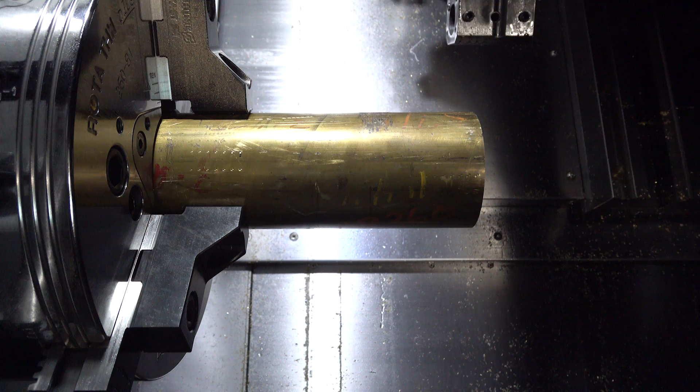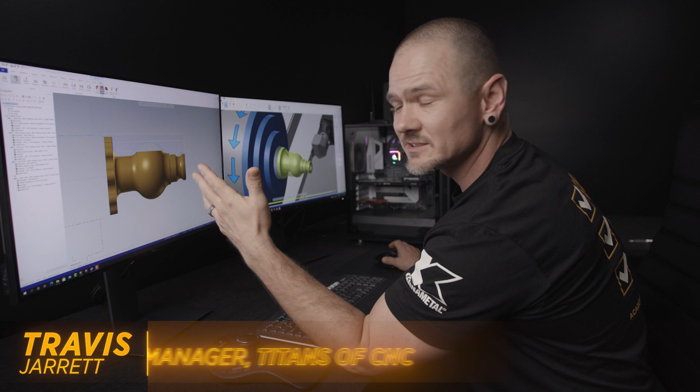As you can see today, we're machining some brass, and we thought this would be a good time to introduce to you a toolpath that maybe you're not necessarily too familiar with. I have not been too familiar with it, so it was good for me to kind of get in there and learn a little bit about it.

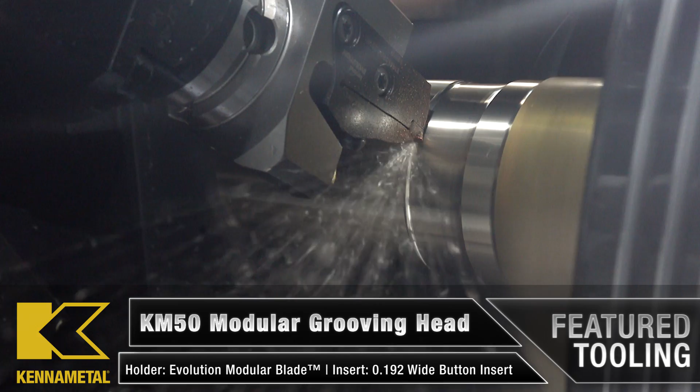It's called dynamic roughing. It's on the lathe, right, not the mill, but it's still dynamic. It uses button tools from Kennametal, which are full radius groovers, and the idea is that it saves you time by turning both back and forward, making lots of chips, helping you get the part done fast.

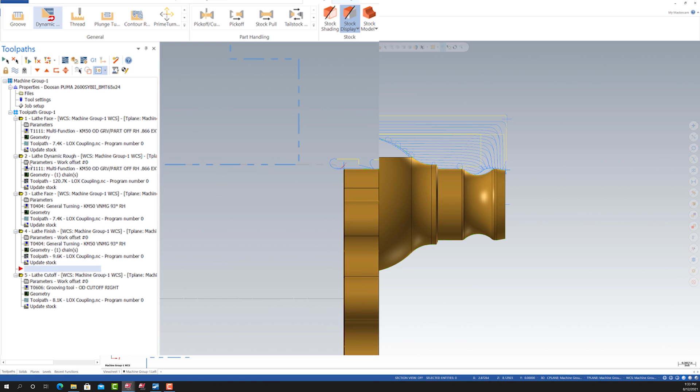So you can see the button is right up here. We have dynamic roughing. I'll click on the path I have right here to kind of show you what it looks like. So if you go to your dynamic roughing parameters, what you're gonna see is choices that very clearly resemble a normal roughing path.

So you have a step over, which is really just gonna be our depth of cut. And we have our stock to leave. And we have all our other standard parameters that you're used to too. You have your feed rate and spindle speed.

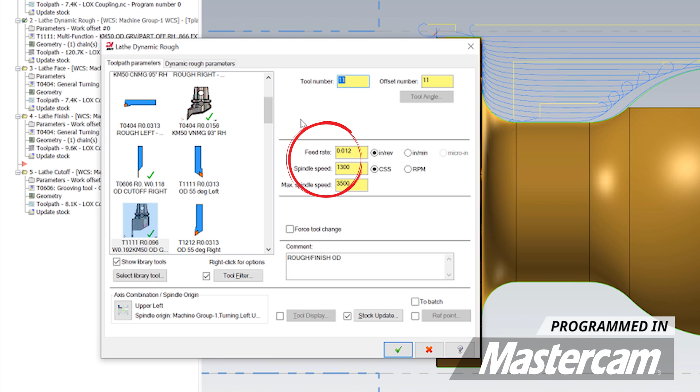I think in all honesty, running this, I probably could have taken a little bit bigger depth of cut, but this is the first time I was kind of playing with this tool path and we were running dry, so this is what we have. Still taking off a lot of chips.

So I hope you guys enjoy our brass demonstration for you guys today. I hope you guys will take a look at this tool path and see maybe how it can help you guys with your turning operations.